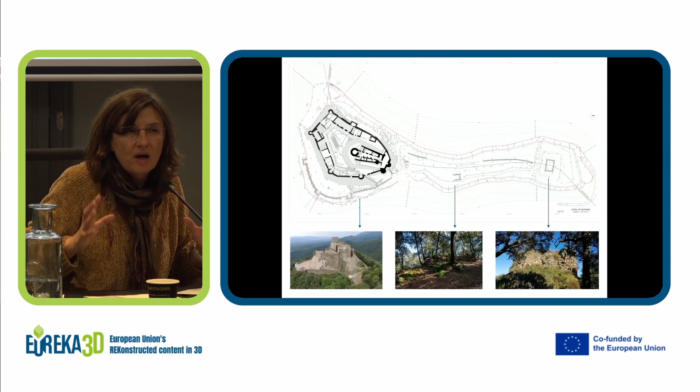Montsoriu is a massive architectural element and a huge archaeological site, and it consists of three elements. To sum up, it's 10,000 square meters. So you can imagine the information we need to convey to the public after 30 years of excavating and documenting this site. It's not small, it's not simple. It's difficult to explain all the information we have.

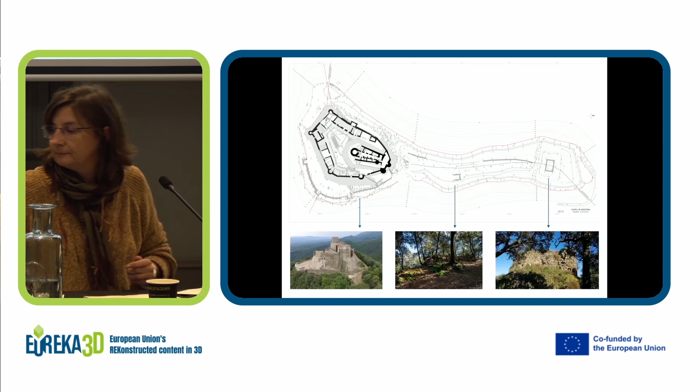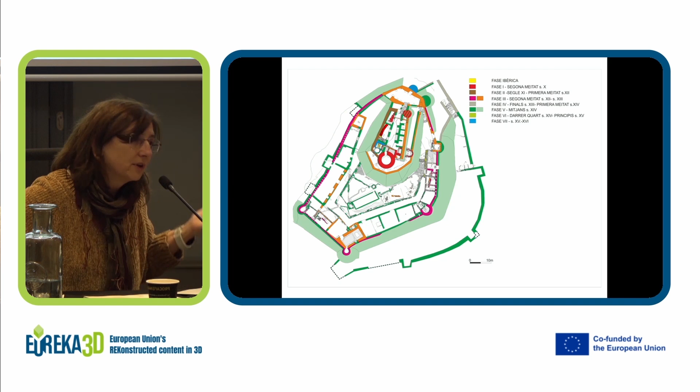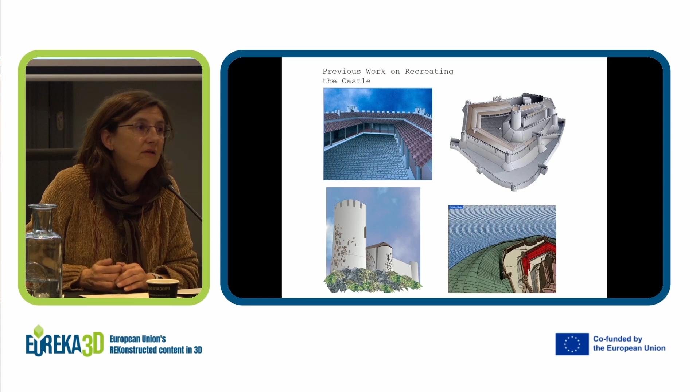And here is where we come to the present. We have to remember that as a museum, we are a territorial museum. Our mandate is understanding, preservation, and dissemination of cultural heritage. And for this, our primary objective is ensuring the population, especially local population, understands, values, and cherishes this heritage. Because it's the only way that this heritage will survive.

If people don't feel that it's their own heritage, it will disappear. And for that, we need to explain to them that this is part of their history and their identity. I don't know if it's the right way to say it in English, the sense of belonging - it's really crucial for everything else.

And here, the image you have is a space just next to the museum. We call it the Cabrera space. Cabrera will be the name of the noble family who owned the castle in the medieval ages. And this was inaugurated in 2022 thanks to, let me read this, a tourist development project financed with European funds, FEDER funds, and led by the Selva County Council.

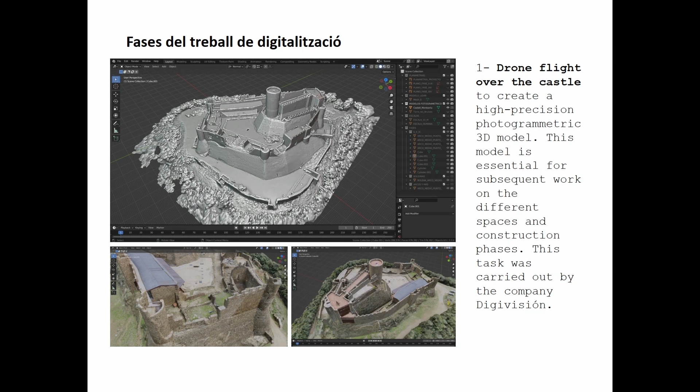And in this project is when we start working with the company DIGIVISION to create the 3D models through the data we had. I think it's better to explain this in the afternoon in the workshop because it's very extended and complicated.

Okay, I think it's better in this moment. It's best, the strategy of the managers, the management of the castle. What do you think? I think you finish and we will complete it.

In the afternoon, we have a session with José Antonio and Quim where you will have time to see all the more technical things and to talk a little bit about the future, because this is going to be the basis for something more. So I will pass this quickly and we'll get faster.

We have been excavating Montsoriu for 30 years, and we have discovered that Montsoriu had undergone 500 years of remodeling. So there's not just one Montsoriu castle, there's at least 3 Montsoriu castles. And here's where the 3D models will help us.

We've got a castle from the Romanesque, pre-Romanesque times, a Romanesque castle, and a Gothic castle. And after excavating and doing all the research, this would be a little bit the idea we had about the castle, which has nothing to do with this one.

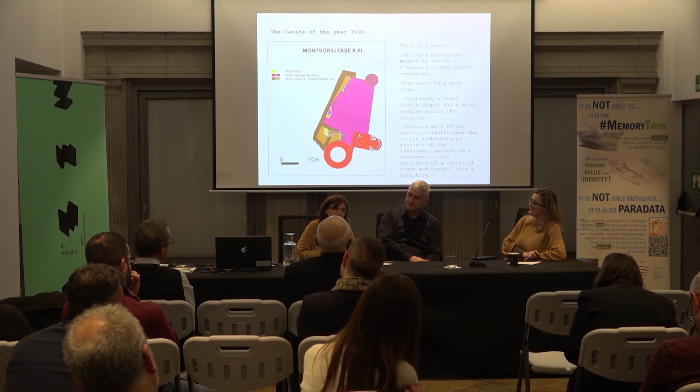I think this is quite better to understand how a castle 1,000 years ago looked like, and it really helps to get to all kinds of audiences, which the other image is not easy to see.

What we've done is recreate these three castles, and in each castle look for an element which was worth going deeper. In this case, it was the chapel, a pre-Romanesque chapel. We found the rest during the excavations. This is what we found.

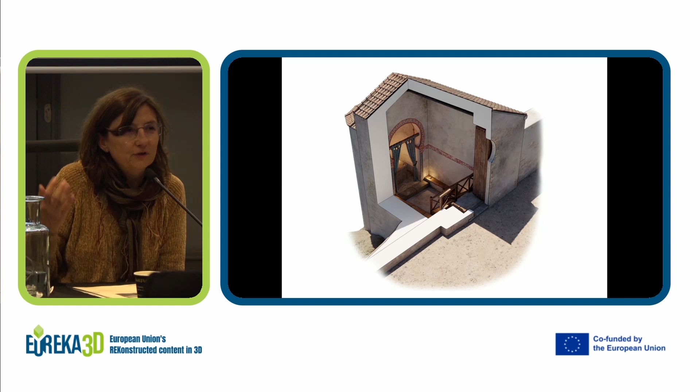After the investigation, looking for parallels of how this chapel could have looked 1,000 years ago, we finally got to this amazing image. We've seen this structure for 20 years, and we could never have imagined this kind of thing. This is so evocative. You can imagine yourself inside with the light and textures. It really gets to you.

Then we have this second castle, the Romanesque castle. It's really the end of the Romanesque style, beginning with Gothic, where the castle expands. It gets really, really big with two enclosures. It's not just the core of the castle, but also expands through all the top part of the mountain. This is huge, and this is impressive.

This is the castle we have a phrase we use a lot about. There was a King's Chronicle, Bernat Desclot, who talked about this castle in the 13th century and said it was one of the beautiful and great and noble castles of the world. It was this castle he saw. Now you can imagine why he said that.

In this castle, what we have done is focus on one corner of the lower enclosure. It's a very complex part because we were so lucky that we could discover how it was in the 13th century and afterwards. We know how it changes through the times in this particular spot. We know now that we are talking about the two buildings on the left, just next to the tower, and the next one.

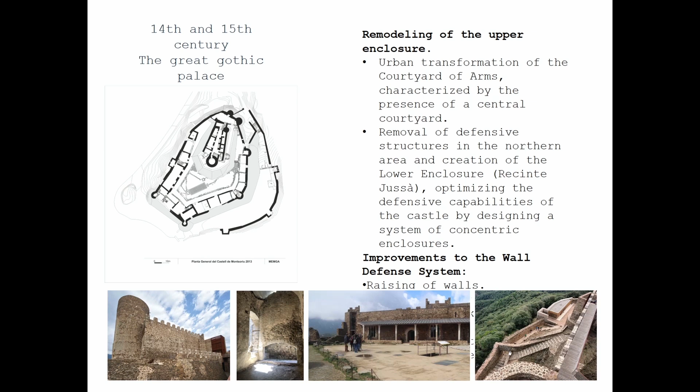The 14th century castle isn't bigger than the other one, it's just different—they changed everything. The lower enclosure, the upper enclosure, they built another enclosure. They changed everything. In the upper enclosure, they built the palace of the family, the owners of the castle, the Viscounts of Cabrera.

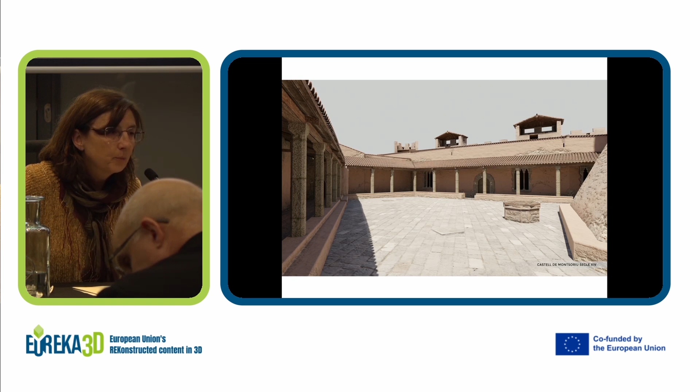Now you see the area, and it's difficult to imagine that was a palace, but with this, you see that it's a palace. We have the courtyard with a porticated corridor around it, and if you want to go inside that door you see at the end, we can go inside and enter the hall that was used as a living room, dining room, representation room.

But we can go to the kitchen and see where the food of these people was prepared, with the oven and the fireplace. We can't smell it, but we can nearly smell the fire, the smoke. For me, this is incredible.

This room now has two walls. And here it's obviously we don't know exactly how the wooden part was, but it's made based on documented other pieces that we know were like this in that time.

And we go again to the same point to see what has happened after this remodelation, and they have this public area we have seen before—the narthex and the chapel—become the entrance of the private rooms of the nobles. And this one circled was what we will call nowadays the master bedroom.

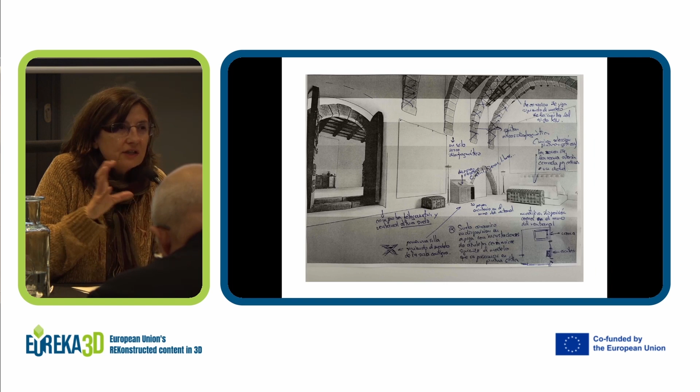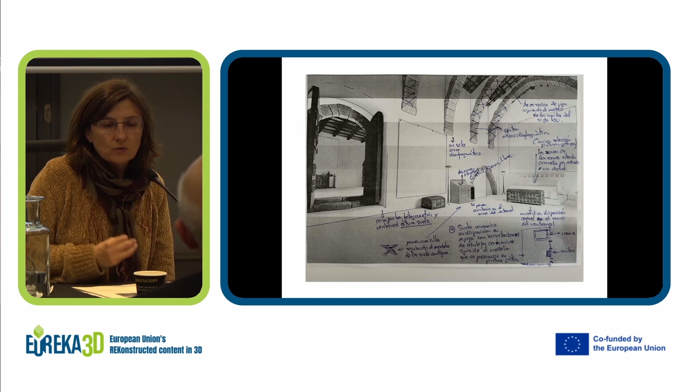We use this one to see just a little bit how the work has been. This is very easy to pass from one point to another, but really this is months of going back and forth to create a model, a first draft, and then add, amend, change, look for advice of specialists that know about historical dissemination, and add everything there.

And finally, you get to understand when we say this was wealth, this was a palace, this was richness—you can enter inside what would have been the most cozy room in the castle in those days.

3D technology plays a crucial role in simplifying the explanation of a complex evolution of such a significant monument. It's really very difficult to explain that in words, but one image is worth 1,000 words. In some cases, it helps make intelligible areas that have undergone extensive remodeling. In others, this principle allows us to reach broader audiences and enhance communication accessibility. Technologies also have this evocative power, helping generate emotions which are essential to create engagement.

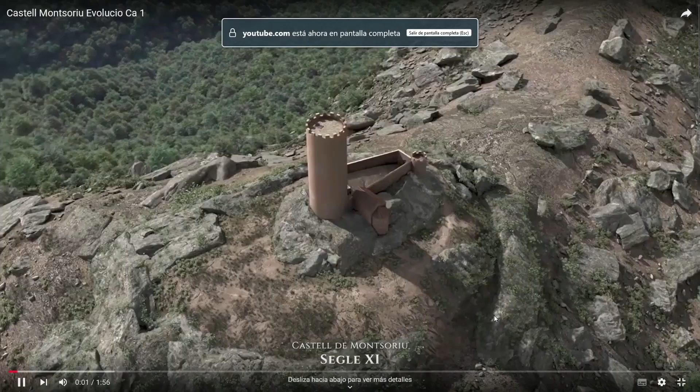We'll use them for virtual reality points and metaverse, and I'll leave that for the afternoon. We talk about accessibility, so we can bring the castle here to you. We'll try. There's no sound, it's just a very short video that sums up a little bit all we have seen.

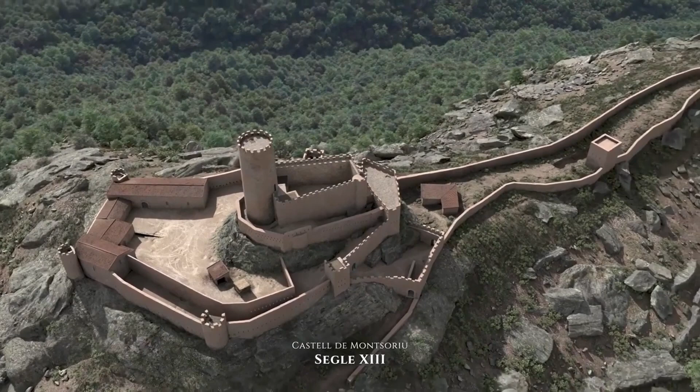It's the evolution of the castle through the centuries. This is what we call the Rocky Castle, I don't know if it's very accurate. How it changes to this late Romanesque style, occupying all the top of the mountain with these two enclosures and this other northern part with the tower. And now how it will change in the 14th century with the great remodeling, the creation of the lower enclosure.

The palace with this courtyard in the middle, and always during all these 1,000 years, the donjon, the main tower that looks upon us until now, and these different focus zooms inside the castle of the 14th century: the kitchen, the hall, and the chapel. And that's it, thank you very much.

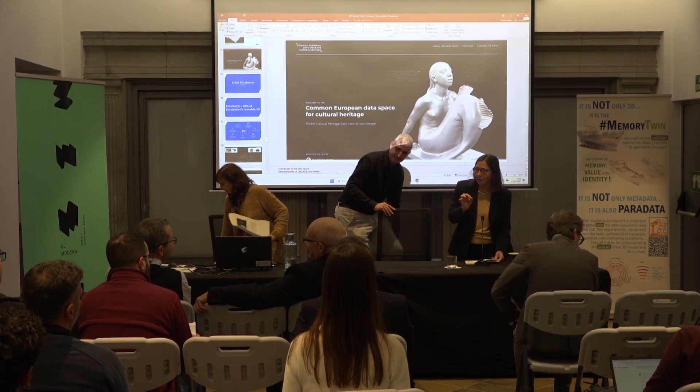So I will be very quick. First, thanks to Albert for having opened a view on what can happen with the use of AI, because we didn't experiment with this in EUreka3D, but it is a new frontier that we have to be aware of.

Thanks to the Museum of Montseny, I'm very sorry that tomorrow I will not join the trip, but it was fascinating. It opens another dimension of what we are doing, the connection between digitization of cultural heritage and tourism, valuing destinations for visitors that are less known but full of heritage and attractive. We are experiencing this, for example, with Bibracte, in a new project that started this year about cultural tourism and valuing peripheral destinations.

But as you know, our work doesn't finish now. We will continue in EUreka3D XR. We will have the opportunity to meet again, to demonstrate the power of moving from a declarative form of communication about cultural heritage to narrative forms. This is the next stage of communicating cultural heritage.